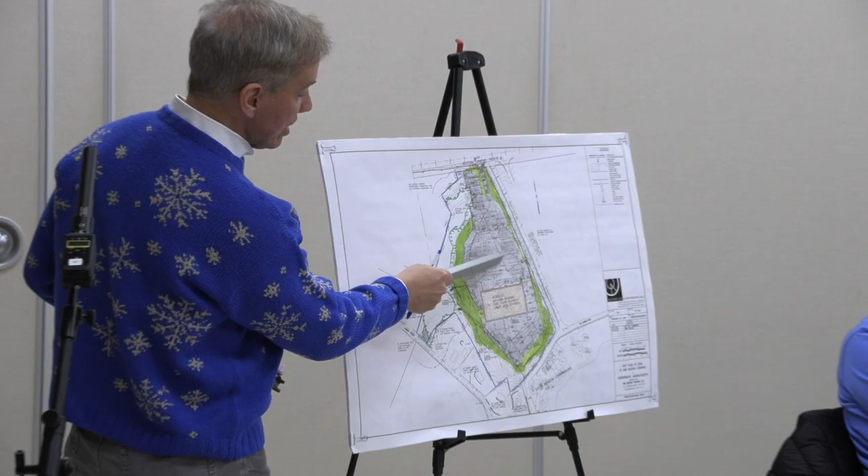Mr. Truman, the town engineer, asked for some more detail regarding the fire cistern. We met with Chief Vona regarding that at his office, and discussed generally what they wanted to see regarding the fire cistern. Basically, we suggested a location on the approach to the building, if a fire engine would be coming down Route 9 heading toward the building, off the side of that central aisle.

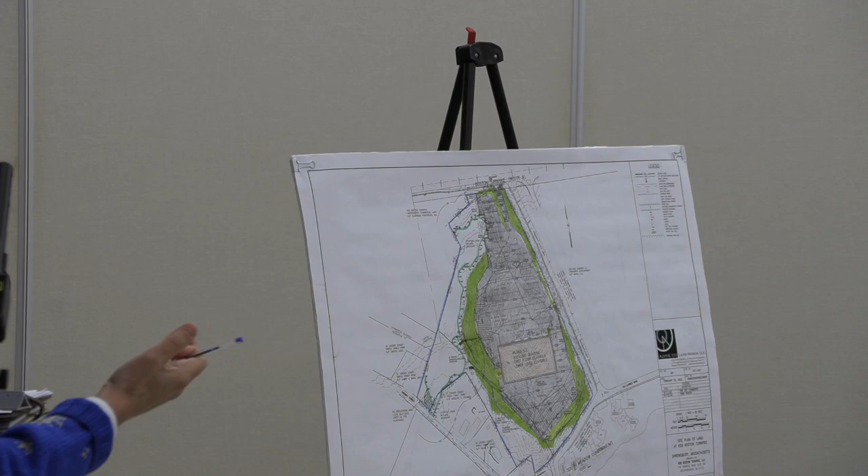It's an area well outside of the 100-foot buffer zone, and we would probably end up having a very small landscape spot, which right now is proposed to be pavement, where the controls and connections would be made. But the fire cistern would have to be worked out in an iterative process with the chief and his lieutenants, regarding the exact size, materials, and number of vehicle maintenance bays, et cetera, within the building itself.

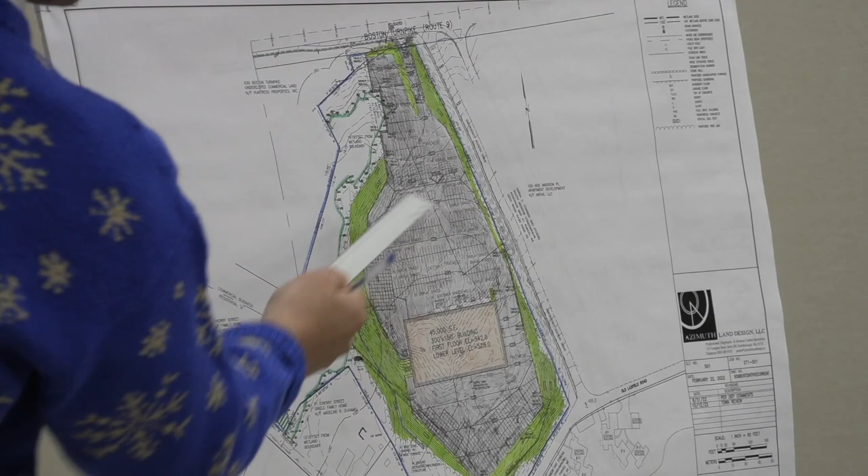But what we wanted to get out of that meeting with the chief is to confirm that there's no insuperable obstacle to the location we proposed, leading to the building, and to understand what the process would be as far as nailing that down.

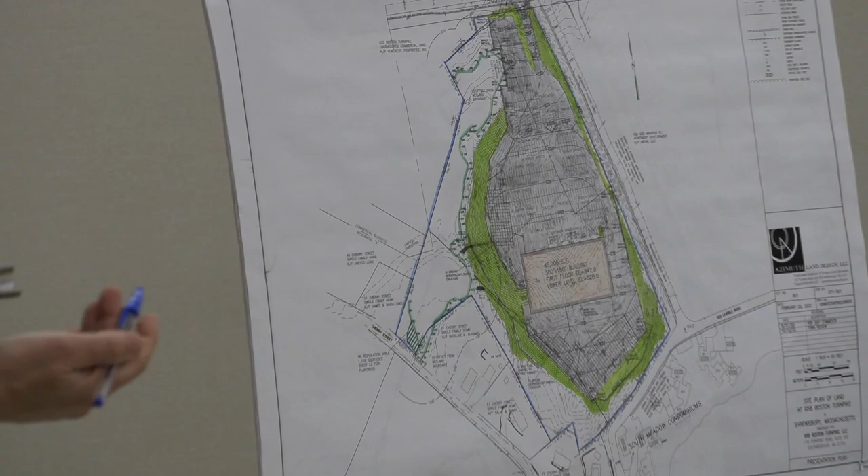Apparently it's just an iterative process of getting them more information about the building itself—the exact materials, et cetera, inside the building—for them to decide the requisite size of tank and exactly what controls they want. This building would also be sprinklered, and that sprinkler system would have connection to this. There's a lot of details still to work out, but the bottom line is we would be able to install this outside of the 100-foot buffer zone.

We would end up probably taking an area of about 4 parking spaces, which are now proposed to be paved on the plan and have been calculated as paved in all the drainage calculations, and making it a landscape surface where the actual connections are available for the fire department when they enter the site, should they enter the site fighting a fire. So that was one item.

Another item was just to answer a couple of questions that had been posed by the abutters and their reviewer. I just want to briefly touch on those. We were asked, would we be filing a SWPPP? Of course, it's more than an acre of alteration and has to be filed, I believe maybe 5 days or a week before actual work starts.

Regarding the area that was altered in getting a machine in to do soil testing for the septic system, what we added to the plans—noted on multiple sheets—is that that area has to be inspected before the wetland replication area is begun by the project wetland scientist, and he has to give a restoration plan to the commission, because none of this work can take place before the passage of another winter and into spring.

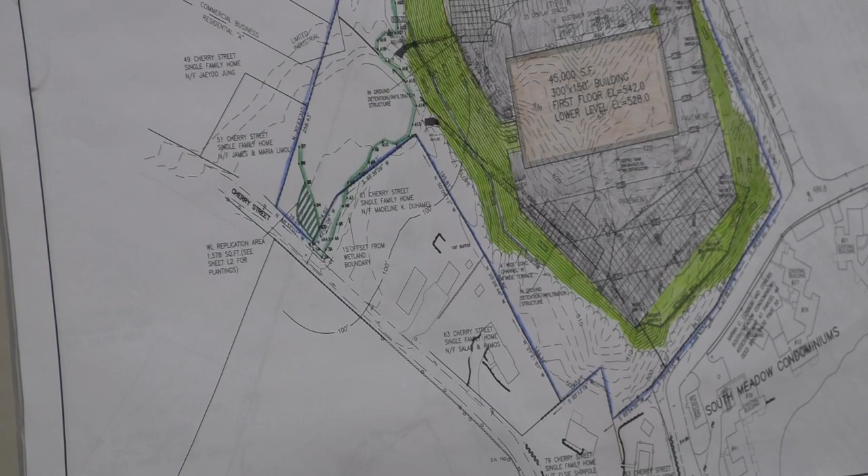So this is several more months now that will go by, and we want the project wetland scientist, in this case Scott Jordan of EcoTec, to take a look at things then, see what the status is, where he thinks new planting is worthwhile as opposed to areas that are already having some recovery. So that issue was one question that had been raised by the abutters.

Another question was in regard to this being a proposed car dealership, which is a land use of higher potential pollutant loads. I think there was a misconception in the question posed. As a car dealership, you're going to have a service area with floor drains and oil water separators. In this case, because it's a septic system and not a sewered area, you'll have a holding tank that will have to be pumped out.

In addition, on the site, all the drainage in the front goes through catch basins and drain manholes, eventually through a CDS 2025 unit to be infiltrated. In the back, similarly, everything goes through catch basins, drain manholes, eventually through a CDS 2025 unit into infiltration.

But I think it was a misconception. I think it would be impossible to pretend that if there were a spill that went into a catch basin, you could treat used motor oil such that you could discharge it to infiltration. One of the values of the CDS unit is that you can capture some floatables, be they motor oil, transmission fluid, etc. There's no attempt, and no one could attempt, to treat spilled motor oil or transmission fluid such that it could be discharged into an infiltration structure in the ground.

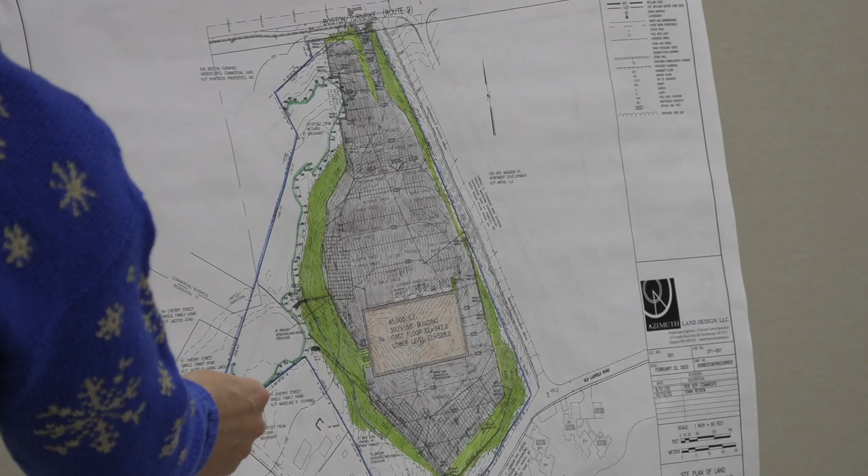Now, some of that is going to be altered in the course of construction, people getting in there doing the footing, etc. of that wall. But it's not going to be permanently under any structure. Some of it is going to come back in the natural course of things. So our acknowledged alteration of 700 and some square feet is actually in excess of the physical footprint of alteration, with a 6 foot extra distance counted in that 700 square feet, for which we would do mitigation with a replication area at a ratio of 2 to 1.

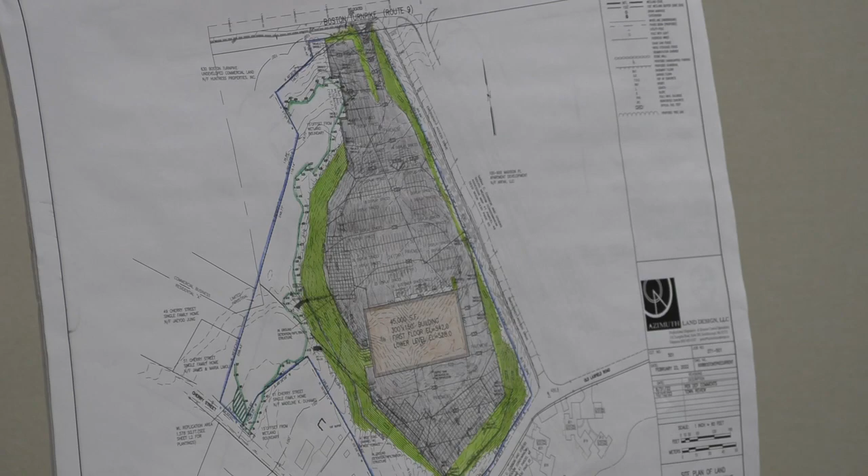Just one more quick point. There was a question in regard to the septic system location, and we had still shown that as a much larger system than is actually necessary to be built there. We looked at just a simple, typical 350-foot trench system, and that actually provides adequate service for up to 36 employees in the facility. Now, there very likely would not be anywhere near 36 employees, but we redrew the septic system leaching area shown on there as that smaller system.

The question was, what's your separation from the wall, what's your separation from the infiltration area? Just for the average 350-foot trench system, it would be 46 feet from the wall and 136 feet from the infiltration system. So we revised the plans to show that the actual system to be installed for the facility would be much smaller.

And I included some pictures. You could see the abutter, Limoli, and the abutter, Jung I believe, behind in that picture. It's a small depression, variously 15 by 25, 12 by 22, somewhere in that range.

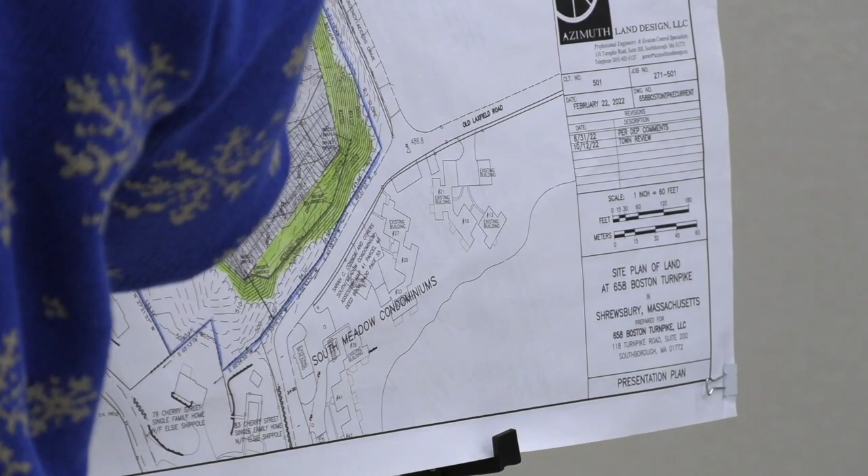Are you building up around the edge of the pavement at all, or does it transition at the same level? A little bit, because over here the natural grade is... let me find the contour, the low five... here it is. So the natural grade here right now is about 524, but because we can't ask cars to come down this quickly or rise up that quickly, we have to go higher. This is going to be 537, so this is a significant fill here, and we're just filling off to the side with a slope before hitting the property line.

That's the South Meadow emergency drive, again with Madison Place on the other side. So we're filling all of this area because it drops too quickly, and we have to soften it up. To soften it, we have to raise where the grade dropped almost immediately from 548 down to 518. We have to soften that from 548 to, this is 538 now here, and again to 35 at the low point. So there's some area to fill. There are areas where the grades are almost even, and again area to fill to the southeast and south side.

So I guess I have two comments. One is that you want to be really careful with the grading so that the water stays on site and gets directed into those catch basins instead of spilling over the edge. Yep. And then the other is, it's nicely colored in green all around it.

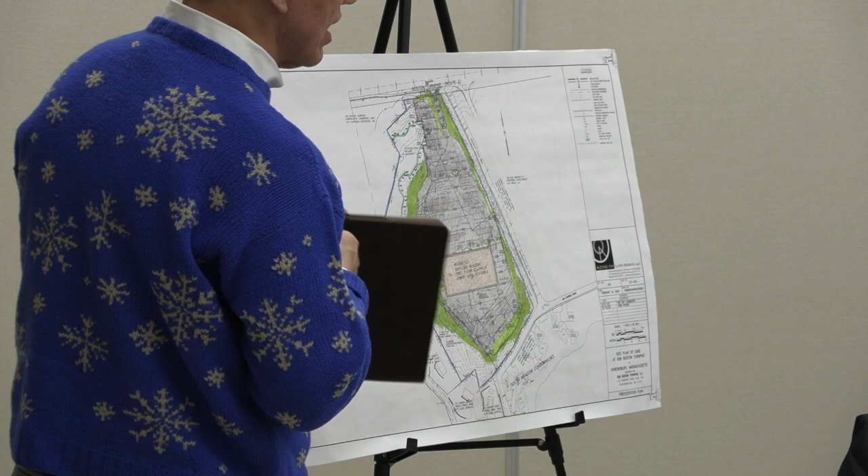Does that mean you're seeding those slopes? Actually, I don't have the landscape plan right in front of me, but I believe that slope is a 2-to-1 slope that's going to have North American Green SC 150BN erosion control mat put on it and seeded with slope mix. Okay.

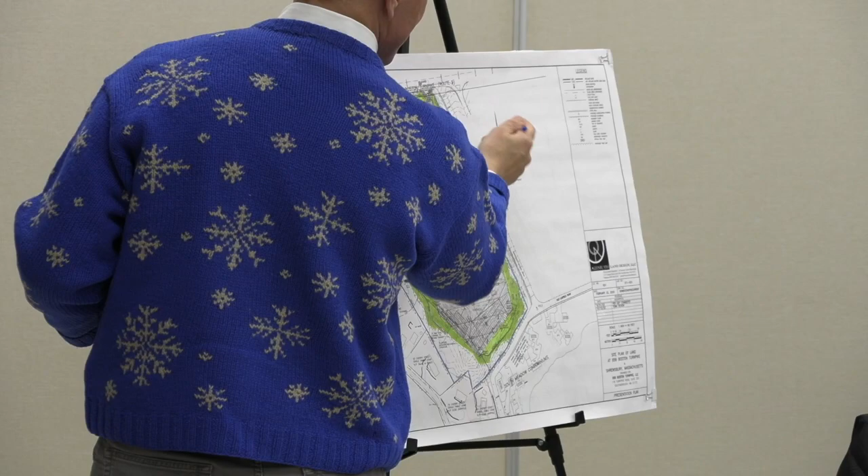As long as it's not ripped out, because this particular spot is actually somewhat out of sight. But you're still going to have vegetation. The actual pavement of the emergency drive is here, and you get just a little bit off that and off the walk, and you've got some vegetation. But this particular face only faces the emergency drive, and after some intermittent vegetation, the access to the Madison Place project. So it wasn't a high priority for landscaping and aesthetics. Okay, I'm set, thank you.

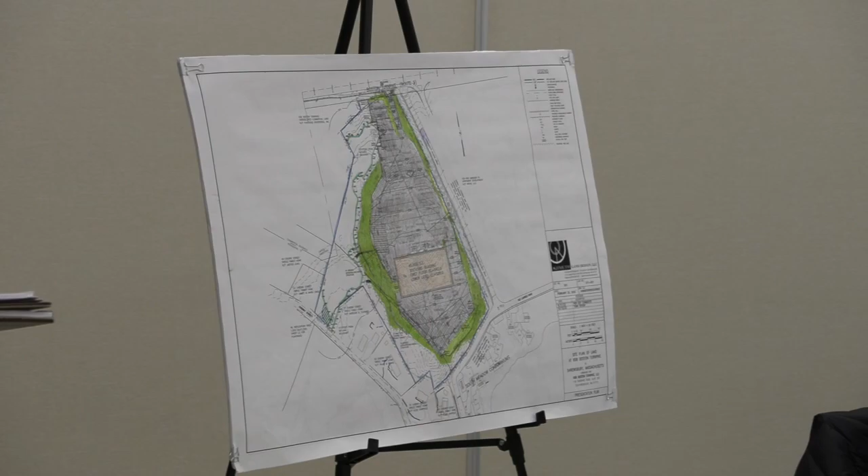I might have some comments on some of the species you suggested, but I'll do that another time. Okay, fair enough. Are you all set? Yes, thank you. Good, I'm all set. Andy? Yeah, I'm all set at this point. Leah? All set. Does anyone in the public have any questions?

I do. I'm Lori Odell, 17 Old Laxfield Road, South Meadow Condominiums. You want to go to the mic, please? No, I don't either. It's not for coverage, it's only for TV. So I want to preface this... where is the microphone? Is this it? Okay. I'm not a contractor, I'm not an engineer, but I'm a realist.

The area you're talking about, Route 9, comes down to South Street, and then down into South Meadow Condominium, into a large wetland. The only green space I heard you talk about was due to the fire department. Nothing about green space surrounding your property, surrounding our property as a buffer. Right now, that downward slope has trees, has granite, and has wetlands. It has a natural balance of earth and a water table. Your softening is going to upset that water table. I live below, we have open space.

You are putting in a giant pavement. There'll be no place for the water to go but down into our community and into our wetlands. In the winter, you'll have salt from plowing a massive area of pavement. That salt is going to go into your drainage system, into our wetlands. You're going to have lots of car traffic. There's going to be oil and gas that when it rains gets into that soil, comes down into the water table, gets into the wetlands below, and destroys the wetlands that are there after you've already destroyed the wetlands on that property.

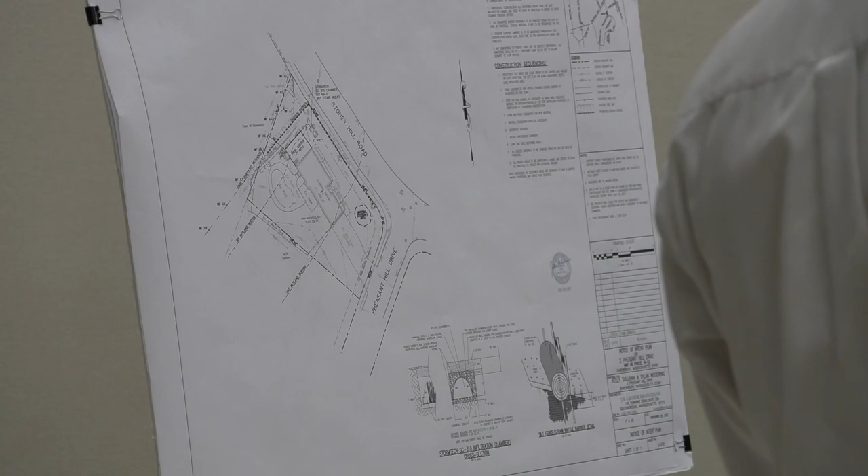Thank you, for the record, John Grenier. Do you have your green card? Or I forget - good job. Yeah, no, he's trying to keep me honest.

Again, John Grenier, Grenier Associates. The proposal we have before you is for a small addition to a single-family home on Pheasant Hill Drive. From what I understand from the owners, the purpose of this addition is to provide a bedroom and a small bath so that an elderly family member can move in with them. So what they are proposing is an 18 by 28 addition off to the north side of the house.

It's a moderately sized colonial style house, so it will have the same roof lines, a gable end, with gutters on both the front and back side of the house where the eaves are. The grade really isn't going to change much at all for the addition - it's a flat yard. There is kind of a historic old stone wall that runs parallel along the edge of clearing that was done when the original house was built.

We did receive an email, we checked today, and I just checked now, it's still not on there, we haven't been issued a DEP file number yet. I don't see any issues with it, it's pretty straightforward, but if it needs to be continued, we're fine with that. They're trying to get this in the ground and done so they can move their family member in, so we're trying to keep it as streamlined as we possibly can.

With that, if there's any questions, I'd like to address them. Chris? No questions. Martha? I'm set. Kent? You can't make it any smaller?

Well, it's a bedroom and bathroom encroaching on the 30-foot buffer. Just asking. They had the full architectural plans done, and it's just for one bedroom and a bath. You could always make everything smaller, but they're trying to give the family member some adequate bedroom space and a small bathroom.

How about some of the bigger boulders out there, sir? There's a wall here that's only 5 feet off, that was gonna be my question. John, you said it has some history to it, that stone wall? Yeah, it parallels it, it's only gonna be 5 feet off the foundation, and by the time you go in—is this gonna be a full foundation? I take it is, for the addition, do you know?

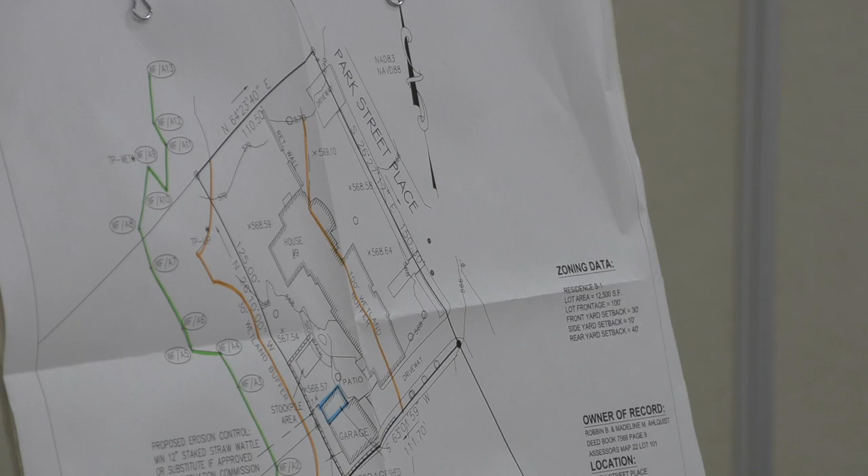Good evening, Kate O'Donnell from EcoTec, representing the applicant, Robbin Ahlquist. I was on site in October of this year. I delineated the boundary of bordering vegetated wetland off-site to the west, shown in green on the plan, with flags A1 to A13. The property is an existing quarter-acre site containing a single-family house, paved driveways, lawn, landscaped areas, and a detached two-car garage with an attached storage area. The proposed work is to replace that storage area attached to the garage with a new concrete slab foundation. The new shed is proposed within the footprint of the existing shed, so no additional impervious area and no new structures are proposed, and all the work is within existing developed areas. The shed is proposed to be approximately 45 feet from the wetland at its closest point.

DEP also made a comment about the presence of bordering land subject to flooding. There is a mapped 100-year floodplain associated with that intermittent stream, but the project area does appear to be located outside it. Additionally, there's no grading, no new impervious surfaces or structures, so the flood storage capacity of the site will not be altered as a result of the project. Lastly, we're showing a straw wattle erosion control barrier at the limit of work. I can answer any questions you have.

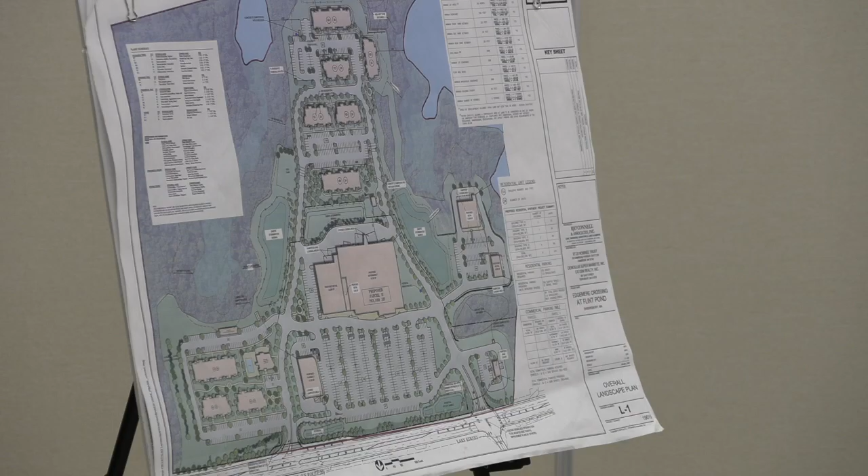My name is Roy Smith. I work for RGO Design Associates. We are civil engineers for the project. The reason why I'm in front of the board is for two purposes.

One is to reclassify 2 of the 6 basins as wet basins. They were originally designed as infiltration basins. However, they are not functioning as originally designed, and they're holding water, so we're going to reclassify them as wet basins in accordance with DEP stormwater management policy. We've done the drainage analysis and resubmitted that as part of this approval process, and we're also submitted in front of the planning board for the basin modification classification.

The 3 standards that really stand out when doing a basin design and modification. Let me take a step back for a sec. There's 6 basins on site, 2 of which are the subject of discussion for modification to wet basins. There's 2 basins along the frontage of Route 20 — this is the Market Basket building — and then there's the residential development to the east and south of the development. There's 2 commercial basins, which are the subject of the modifications to wet basins, and then 2 other basins that are going to remain as infiltration basins.

All the basins have been built and have been functioning on site to date. Basins 4 and 5 are behind the Market Basket and to the side of the Market Basket building. If you've been out to the project site, you'll probably see them. Basin number 5 is pretty wet — I think I'm going to name the basin after myself — but it's holding water. It held water all throughout the summer season, which was a significant drought.